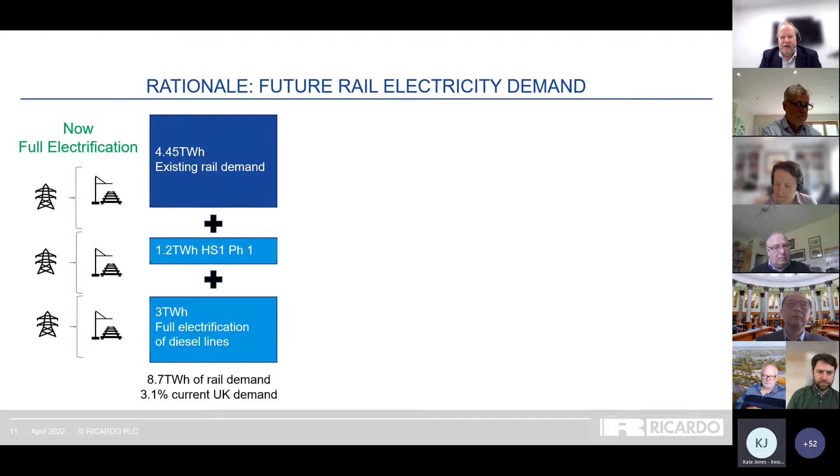The first was to look at trackside batteries - the conventional solution, but with a battery system buffering the grid connection to the railway.

The second option was discrete electrification with a battery on the train. In this case, we don't electrify all of the track, but we provide around 10 kilometers every 40-50 kilometers or so to recharge the train battery as it passes under a short section of overhead line. This requires a bit more storage trackside to cope with the peak demand to recharge the battery on the train, as well as power it through those 10-kilometer stretches.

The alternative we looked at was hydrogen - either direct connection of renewables to hydrogen production, or potentially using grid electricity, storing hydrogen either at the production site or at the rail depot, and then refueling at the depot to provide the trains with fuel for the coming day's service. So that's the concepts we looked at.

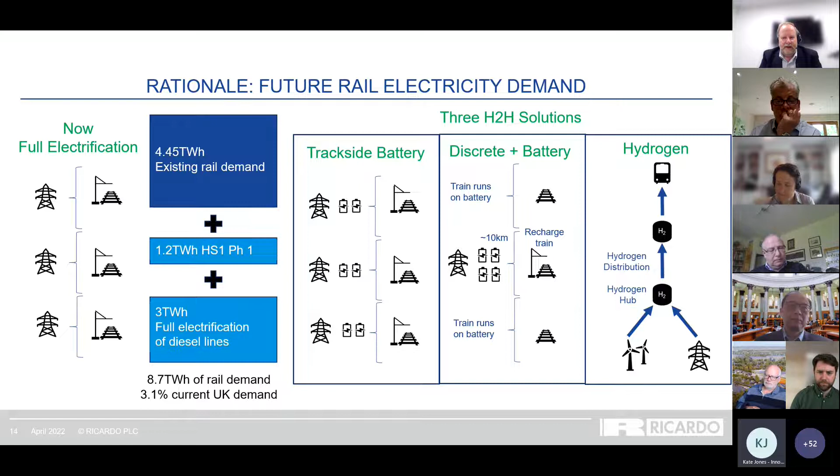The things driving us towards this were that full electrification has a high capital cost, well known to be expensive. Since the rail decarbonisation strategy was looked at a couple of years ago, we're in a slightly different situation - costs are a concern to the railway given competition with other modes and lower passenger ridership numbers. Full electrification adds a very substantial fixed capital cost at the beginning, plus operating and maintenance costs through the long-term life of those assets.

If we think about full electrification, we're adding a substantial amount of fixed demand that's inflexible, unlike other sectors of transport like EVs, which will have more flexible charging. We noted that in 2020 there was a curtailment of about 3.8 terawatt hours - quite similar to the additional railway demand they were planning to add. That cost consumers £243 million, around £8.5 per household. So if we can be more flexible in our electrification decarbonisation of the railway, perhaps we can access some of those savings for customers.

The final thing is that these solutions require a more collaborative and smarter approach. Historically, the relationship between the electricity industry and the rail industry has been rather transactional, using standard solutions. As Matt pointed out, we need to be working collaboratively on these kinds of solutions.

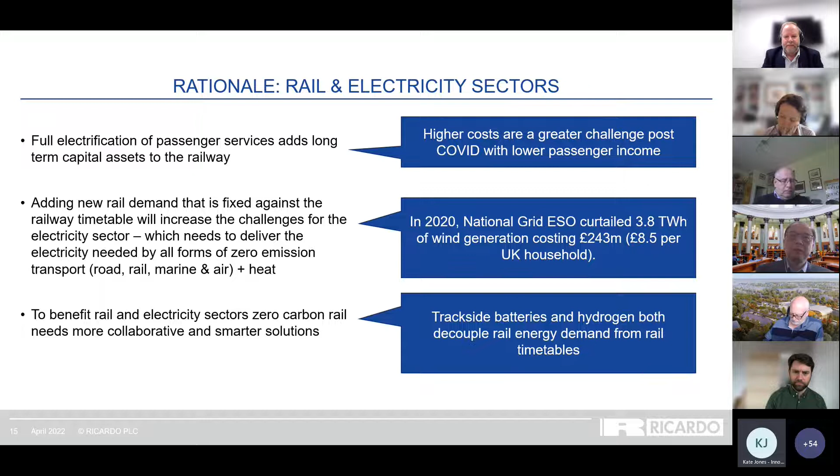So why did we choose Scotland? Several reasons. For the railway, the plan to remove diesel passenger trains is a little earlier, five years earlier, in 2035. Scotland's railway has always had a more holistic approach between the infrastructure operators, Network Rail, and the train operating company, ScotRail. Now that ScotRail has moved into public ownership, both are public sector organisations, so having a collaborative, integrated, holistic solution has better baselines to work on.

From the energy sector point of view, Scotland has higher ambitions for renewables and hydrogen, and a lot of Scottish power is already produced from renewables. There are also more constraints on renewables, so the benefits of flexibility and being able to release some wind farm constraints would be more realisable in Scotland earlier than perhaps in other parts of the UK.

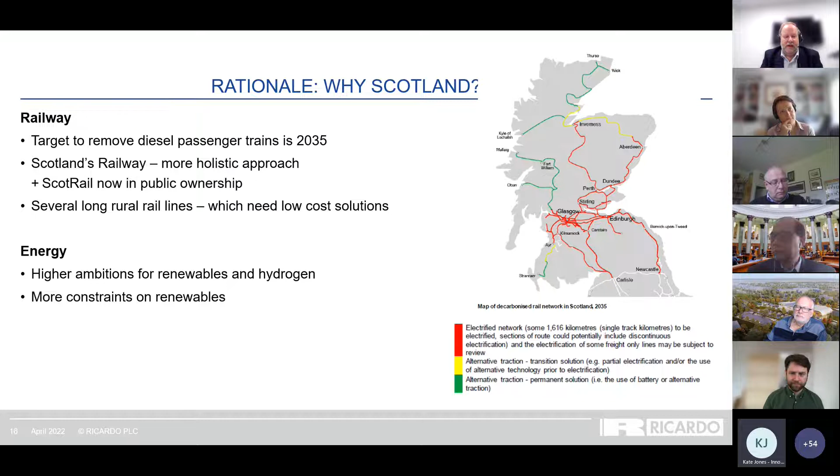Zooming in on the two lines we chose - the first is the line from Inverness to Thurso and Wick, which is 280 single track kilometres, quite a rural route, taking some long excursions inland to avoid high gradients. It's relatively rural, so a relatively modest number of bridge interventions, which are costly for full electrification. We looked at the traffic and the substations as part of our assessment.

The second line we looked at is slightly shorter - from Girvan on the southwest corner of Scotland down to Stranraer. The plan under current proposals is to electrify fully from Glasgow to Ayr and then Girvan, but not to continue the further 65 kilometres south. There's quite a large number of bridges here because it's a slightly more populated area than the line north of Inverness.

So those are the two lines we chose, hopefully giving us two examples that would explore the different solutions and see whether we came out with some conclusions.

So, next slide please.

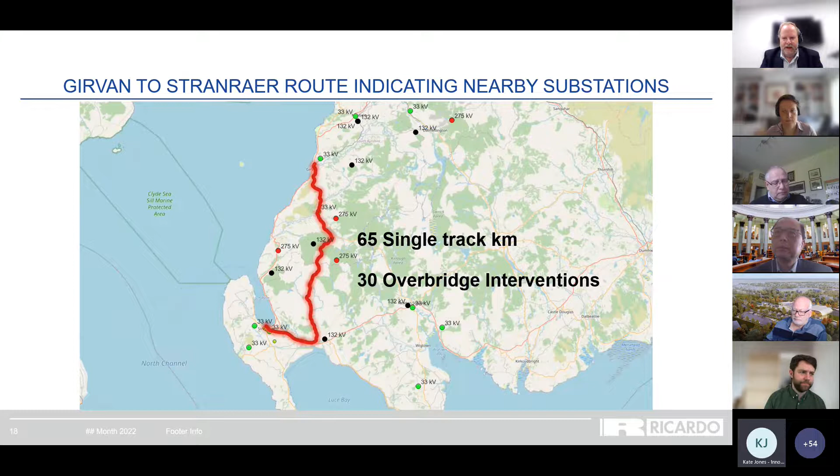We undertook a large amount of data collection and stakeholder consultation, including the project partners, but also talked to two other discovery projects: the Hubs project led by University of Leeds, which we are also a partner in, and the rail decarbonisation planning project, which you'll hear about later. We shared insights with the relevant discovery projects in this early phase. We also spoke to providers of hydrogen trains and companies involved in partial electrification to understand costs and problems. We attended the first rail conference in Scotland post-COVID, making contacts and gaining insights from delegates and speakers.

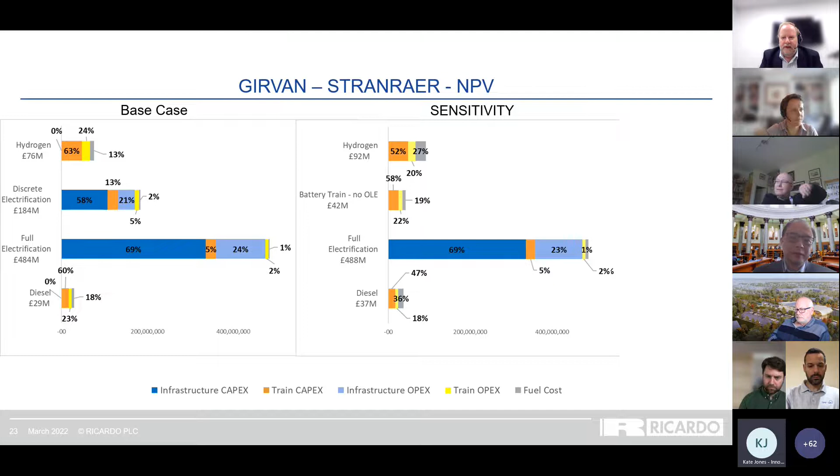We took a qualitative review of the flexibility aspects. We would need to do a detailed half-hour analysis of demand to do a financial cost-benefit analysis of the flexibility benefits to the electricity sector. But we did a qualitative review looking at which of the flexibility services currently in the UK electricity market could be accessed by the hydrogen or battery solutions, and that showed that the majority would be accessible by the scale of system we had in mind.

If we proceed to Alpha, one of the key things will be to quantify that by using more detailed time series analysis of the electricity demand for the trains, and therefore the impact on hydrogen production or battery storage by the trackside.

So our next steps are twofold. The green hydrogen fueling solution for hydrogen electric trains is the lowest cost for the Far North Line, and that remains the case under the sensitivity analysis we've done so far. In Alpha, we propose to assess the full benefits of that, particularly focusing on the flexibility aspects of green hydrogen production, and to work through some of the more practical aspects to make sure there are no major practical barriers or costs that were missed in the initial 8-week discovery phase.

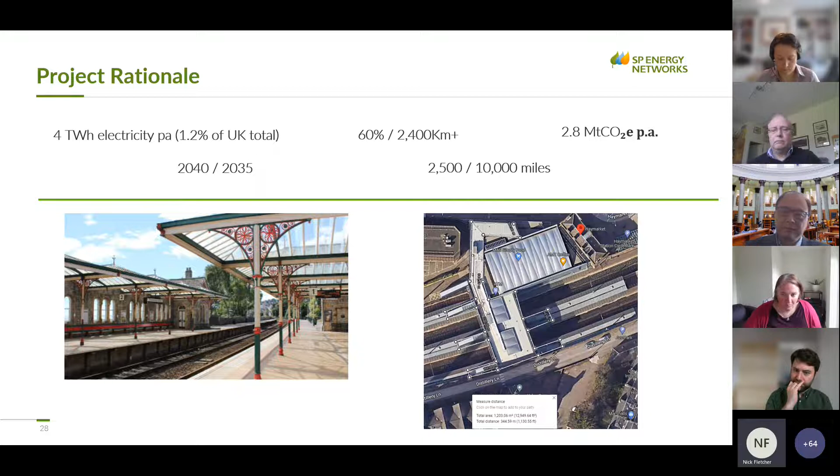So what is the Hubs project and our approach to the discovery phase? Hubs is basically looking at how we can bring together renewables, hydrogen supply, etc., around these railway stations. Within the UK there are 2,500 stations. Not all of them will be applicable to the Hubs model we're suggesting, but we're looking at what we can do for the vast majority possible.

We like to think this is the first of a kind around these stations, and also that these will be able to link cities and communities across the country to support green mobility and the future requirements of the power grid. There are two major driving factors of the energy hubs: one is to reduce the carbon emissions of the rail stations and make them carbon neutral, the other is to retain financial competitiveness in the transport industry compared to other means of transportation.

There are 4 key technology pillars to our approach. First, there's machine learning assisted digital twin technology. This gains us insights into energy flows, provides predictive energy management, and improves overall energy efficiency.

Secondly, there's a wide area optimal planning and operation coordination framework to network and integrate hub flexibilities and enhance rail power supply resilience and provide services to the power grid.

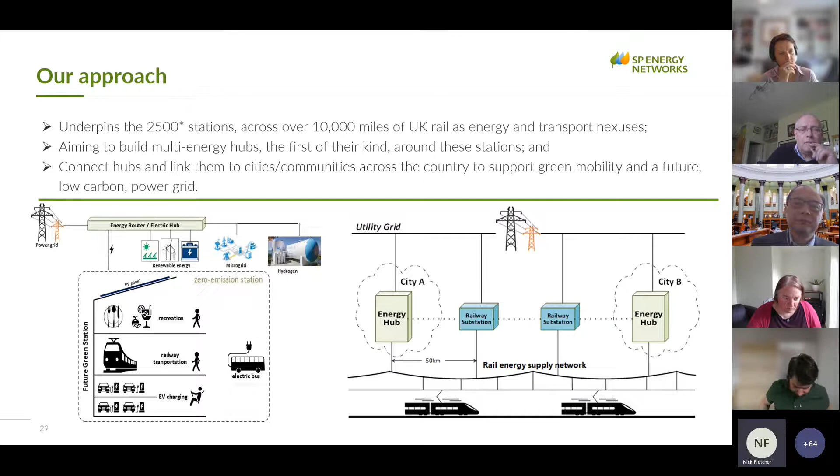We looked at a considerable number of stations, predominantly in Scotland. We tried to look at different classifications of stations - not just those with a high volume of footfall, but rural stations as well, which might be applicable from that set.

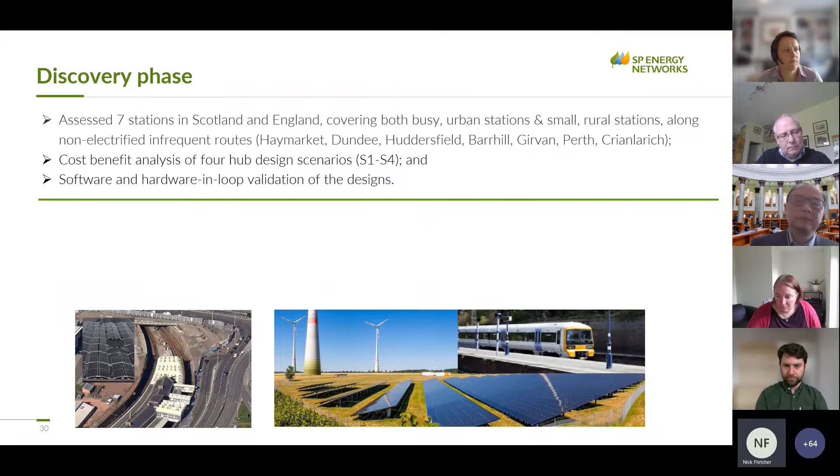As you can see here, we looked at 7 different stations altogether, and a number of different scenarios because obviously one size will not fit all. Each of these scenarios builds on the other - the first is looking at station roof photovoltaics and battery storage, adding on to that then car park PV canopy and so on until you get to scenario number 4.

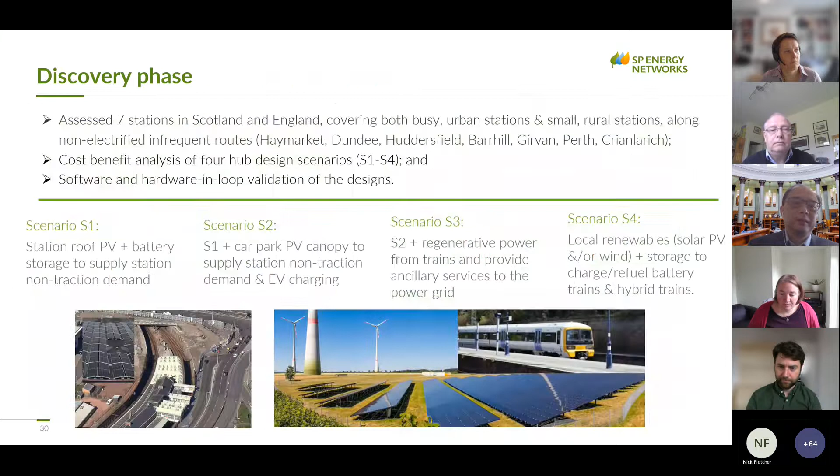In the second scenario, building on scenario 1, we included the car park PV canopy. The CapEx has increased to just over £500,000, but at the same time the OPEX has fallen to nearly a third in both cases, with a payback period of 4.7 years in one instance. The final one, scenario 3, the recommended design, results in a net zero station, with a considerable fall in OPEX. The cost benefit analysis shows the example payback period of the first 3 hub designs for a busy urban station is between 4.7 and 7.6 years in the context of increased tariffs.

This is on the route Colin was talking about, to Girvan and Stranraer - this is the rural station, Barrhill, deemed unsuitable for electrification. Our energy hub design can recharge and refill batteries and hybrid trains with an optimal payback time of about 12.6 years. This avoids expensive electrification investment for those rural, infrequent rail tracks.

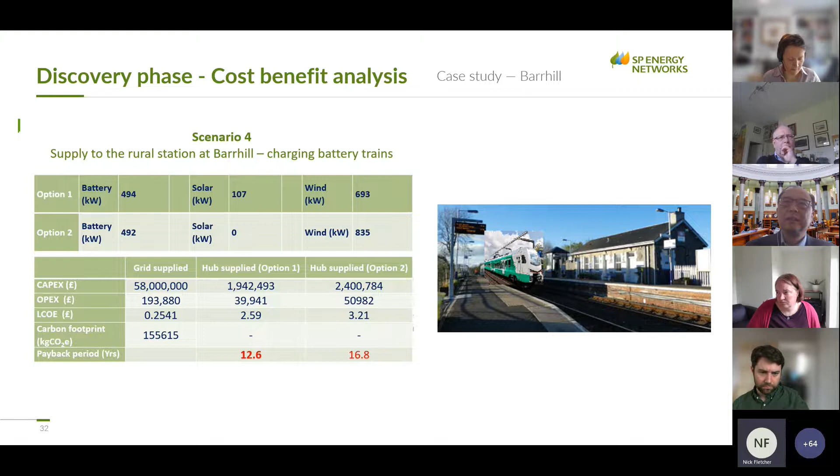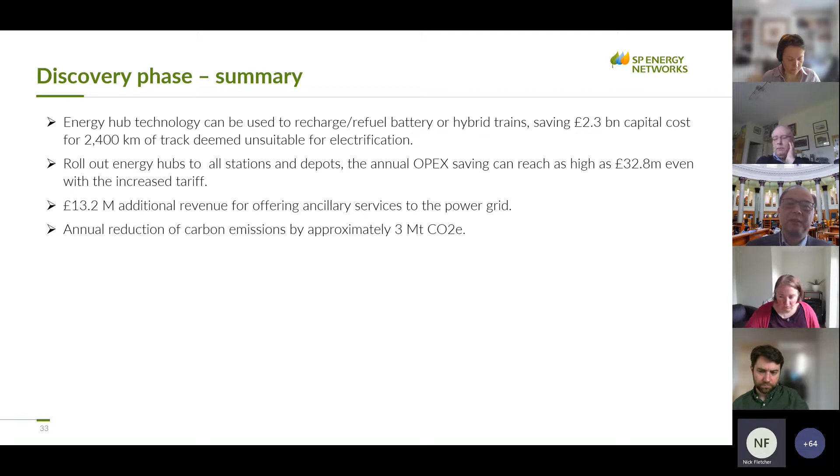As you can see, several things came out from the actual discovery phase that the team conducted. In 2020 to 21, of the UK's nearly 16,000 kilometres of rail routes, about 10,000 kilometres are not electrified, accounting for a share of 62% of trains running on diesel. To decarbonise the track which cannot be electrified, Energy Hub technology can provide total capital cost savings of about £2.3 billion if the hubs are used to recharge and refuel battery or hybrid trains.

On the second point, the UK's annual non-traction load is 440 gigawatt hours and costs around £48 million. If energy hubs are built for all stations and depots, the annual OPEX saving can reach as high as £32.8 million with the increased tariff.

In the UK, there are 343 large railway stations, which can provide more than 600 megawatts of power. The scaled annual cost of firm frequency response is £22,000 per megawatt hour, which represents £13.2 million additional revenue if the hubs offer ancillary services to the power grid. So it's not just taking from the grid, it's giving back to the grid as well.

The rollout of energy hubs to all stations would lead to an annual reduction in carbon emissions in the UK by approximately 3 million tonnes of CO2.

All 4 design scenarios have suggested the payback period for the optimal hub design is between 4.7 to 12.6 years, depending on which scenario you choose. As I said before, there's not one scenario which fits every station — we have to allow for variations in station design, layout, etc. For busy urban stations, scenario 3 is recommended, which offers deep decarbonisation and better efficiency, with a payback period of 7.6 years.

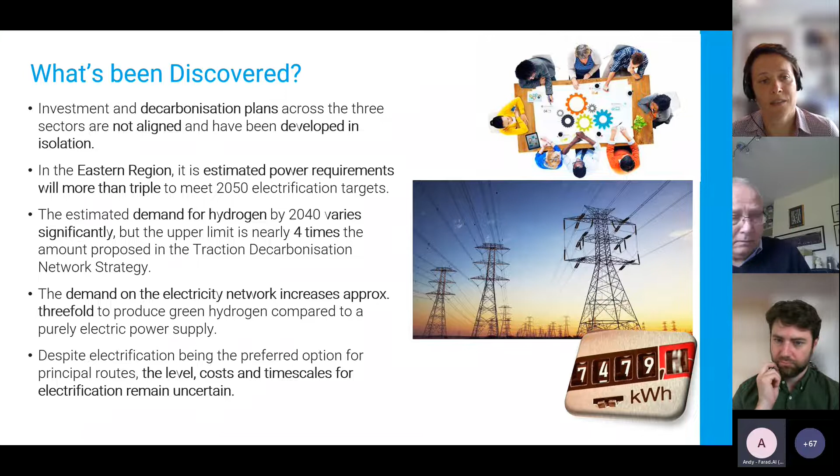The gaps that remain: the greatest challenge is to replace diesel rolling stock with cleaner, more environmentally friendly forms of traction power. With a proportion of the current diesel rolling stock approaching its end of life, there is an urgent need for the rail industry to develop a viable strategy for fleet replacement.

There is significant uncertainty regarding the level of electrification likely to occur due to affordability and timescales of delivery, requiring the rail industry to find other viable low-carbon solutions to replace diesel fleets, with hydrogen fuel cell power being an obvious choice for many. Hydrogen fuel cell powered trains are a viable and technically feasible option to replace many diesel-powered vehicles, however they have limited use cases and are not suited to high-speed passenger services or freight services in particular.

Despite such challenges, the distribution of hydrogen becomes a key factor in making hydrogen-powered trains operationally useful. Depending on the level of electrification achieved, the need for hydrogen varies significantly, and where it will be needed. Further work is required to understand the whole life costs of different electrification system types versus alternative traction power technologies, including the most cost-effective methods for generation and delivery of hydrogen to where it's needed. This requires collaboration from all three sectors to develop a data-driven methodology that can determine the least regret options to achieve rail decarbonisation in the required timescales.

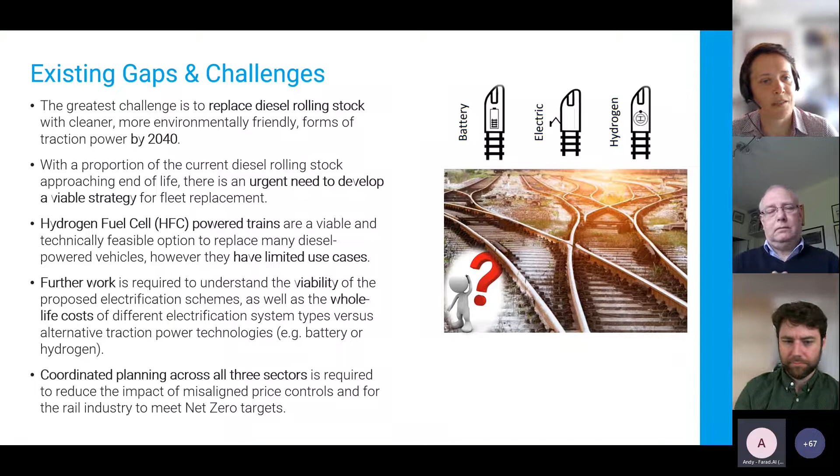After reviewing the work done to date, it's clear that closer coordination between the energy networks and rail industry, combined with a more analytical approach, is required to assess the optimal interim and long-term rail decarbonisation solutions. From the discovery phase, it was found that current decarbonisation plans are in the most part developed in isolation without utilisation of optioneering tools that can encapsulate the coordinated short-term and long-term benefits across the rail sectors. It's also clear these plans have been developed on the basis of historic interactions with minimal consideration of how the changing energy landscape will impact other sectors.

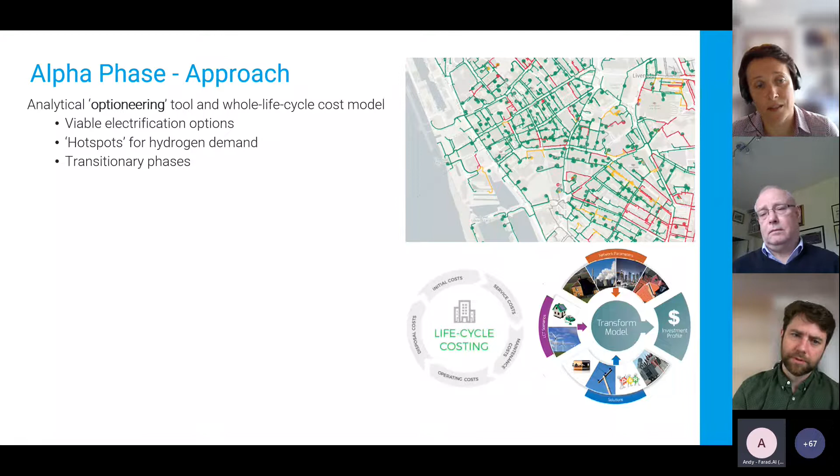An alpha phase is needed to showcase how a collaborative data-driven approach can improve efficiency of decarbonisation planning and demonstrate the cross-sector considerations that will need to be made in future infrastructure and investment plans.

This will identify least regret opportunities in the electricity, gas and rail sectors for coordinated investment to accelerate rail decarbonisation at lowest cost to GB energy consumers. An optioneering tool will be developed to identify the optimum, intermediate and long-term decarbonisation options available, considering whole life costings. The decarbonisation solutions considered are: electrification, partial electrification with battery technology, local electrolysis hydrogen production, hydrogen production at scale remotely then distributed to the railway by pipeline, and continued use of diesel up to 2040 or switching to green diesel.

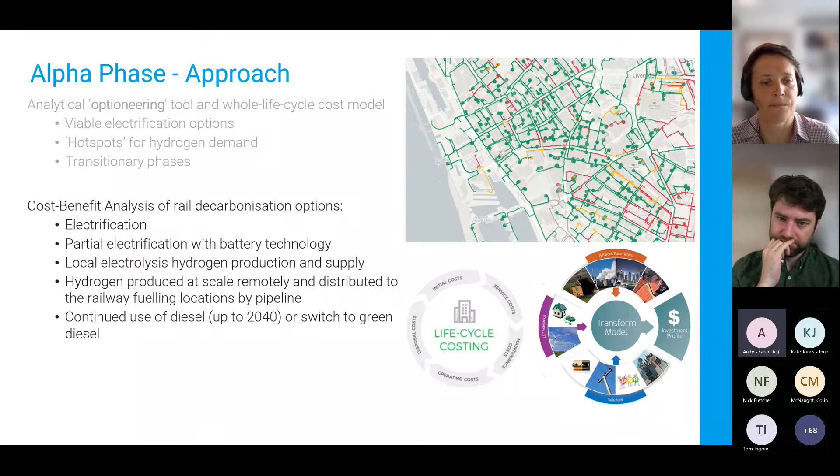Next slide, please. The primary outputs will be an optioneering tool comparing the decarbonisation options across a selected case study region, Tees Valley, and then proposing a beta phase business case.

The tool will enable the rail industry and energy networks to align infrastructure investment in a cost-effective way that will deliver decarbonisation of rail. It is envisaged that following a similar methodology, the tool will be able to be scaled for deployment across the UK, factoring in local rail and energy infrastructure developments, utilisation forecasts and specific needs.

The beta phase will separately take the recommendations from this tool to identify where a demonstrated project offers the greatest potential to gain whole system experience of operating a pilot hydrogen train fleet and least regrets opportunity for Northern Gas Networks and other stakeholders in the region.

At this stage, the primary users are considered to be the energy networks and rail industry, but there is also potential for interest from renewable generators, hydrogen production facilities and other emerging sectors in a hydrogen fuel source.

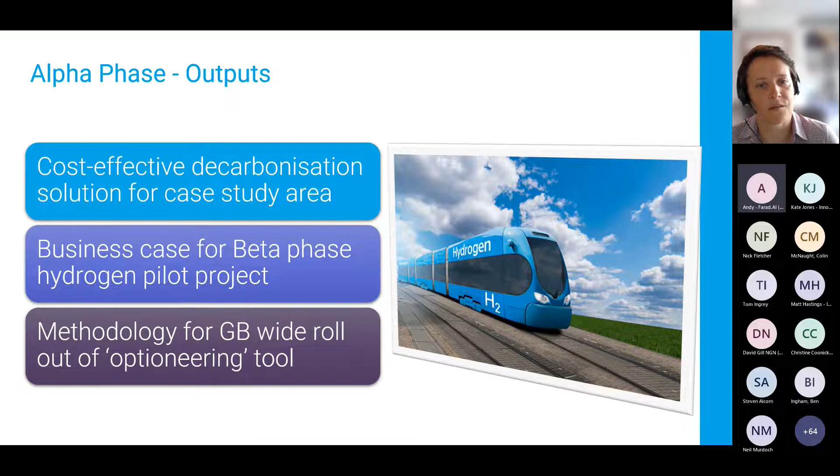Next slide, please. The benefits of this will be through the development of a cross-sector decision support tool that will enable cost-optimised decisions to be made when considering what decarbonised options are available to replace the existing diesel trains with net zero replacements. In general, the coordinated approach will lead to improved infrastructure investment planning to identify efficient investment opportunities that reduce expenditure and stimulate the hydrogen supply chain.

Accelerated decarbonisation of the rail industry through efficient planning and utilisation of existing infrastructure, and a cost-efficient, low-carbon, reliable rail industry benefiting consumers, industry and the wider economy.

The wider impacts, although the optioneering tool is specifically focused on decarbonisation of rail transport, our project will generate learning that is relevant to other sectors. In particular, as infrastructure for hydrogen is developed, other users and industries will need to ensure that there is a fit with their own business requirements and location. Our tool could potentially be adapted to support their decision making.

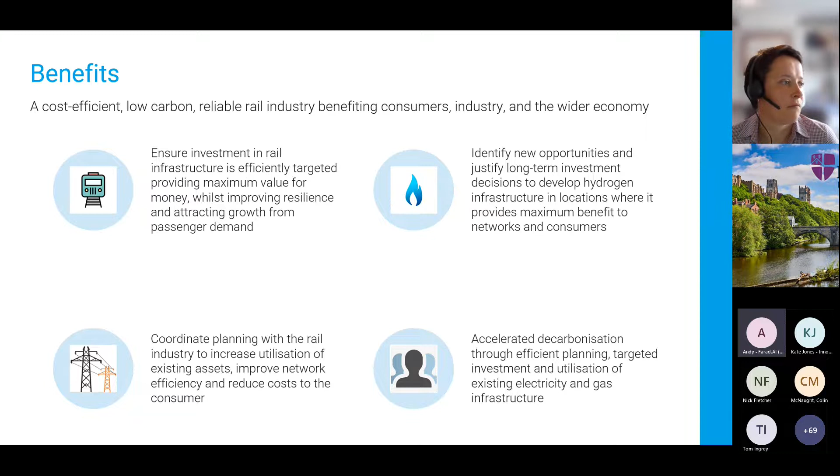And to conclude, the discovery phase has found that investment and decarbonisation plans across the three core sectors are not aligned to date. The level costs and timescales for electrification on the rail network remain uncertain. The demand for hydrogen varies significantly, both in quantity required and where it is needed, and a coordinated approach is required to meet decarbonisation targets on time and in the most cost-efficient way.

An alpha phase will develop a data-driven methodology that can determine the least regrets options to achieve rail decarbonisation in the required timeframes and at lowest cost to GB energy consumers and rail network users. And it will leverage the stakeholder relationships across all three sectors and expertise of project partners.

And that's it. Thank you very much.

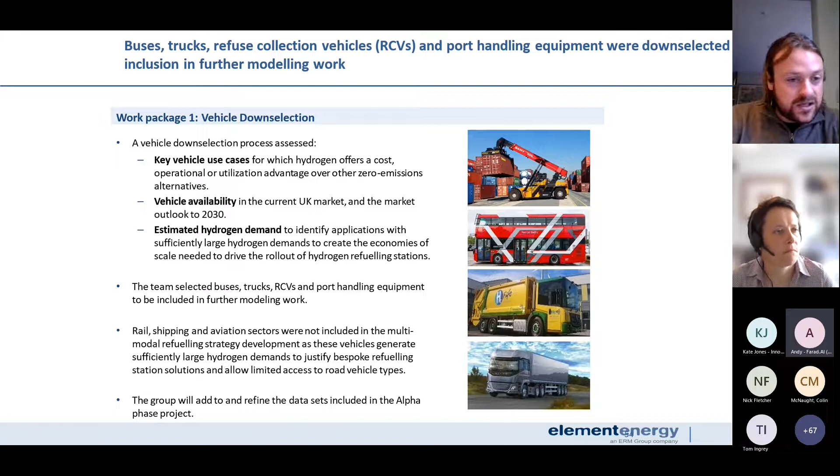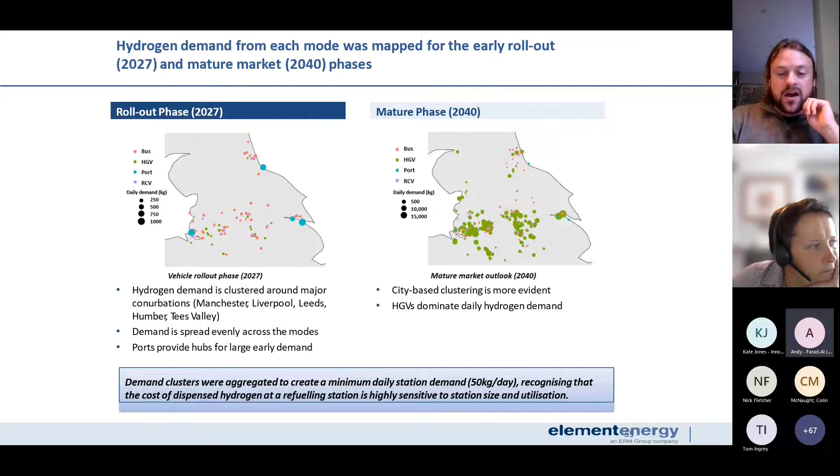What you can see, perhaps less clearly in the rollout but starting more clearly, is that demand is, as expected, likely to emerge around the major conurbations in the north. While initially these modes will be fairly scattered, as we get to a more mature phase, freight is likely to dominate in the road transport sections.

So that's more or less just summarising what I've told you - things like ports are great sources for hydrogen demand.

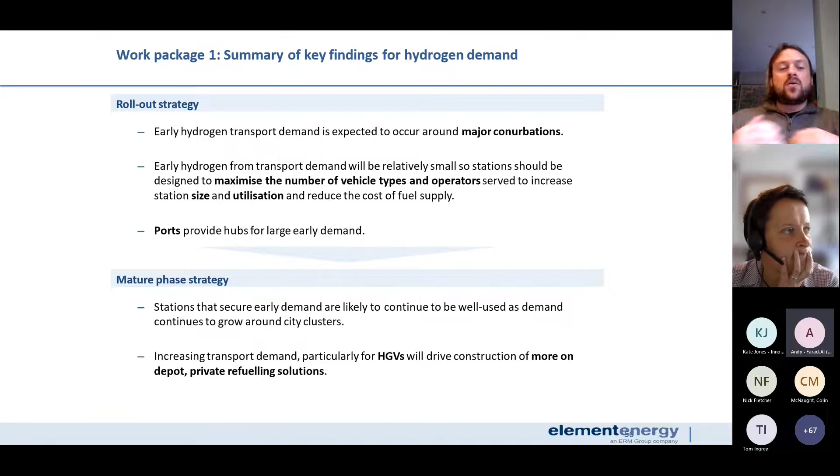If you're looking at demand emerging in the early phases and looking to build stations there, then stations built around those early demands are likely to continue to be well used as demand grows around city clusters.

The next part of this is that the Athena tool takes into account data on the routes of HGVs and a number of other vehicles, and tries to assign optimally located hydrogen refuelling stations to scale up their size, while taking into account real world detour constraints.

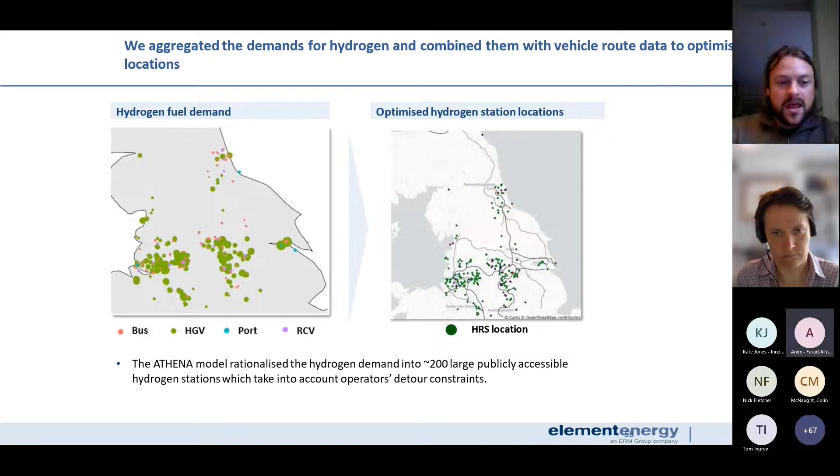So there's a real economic driver for operators to shift their diesel behaviour patterns slightly, certainly in HGV sectors where they might have fuelling at their depot. There's an economic driver to find optimally located stations where a number of operators can share these refuelling facilities and significantly reduce their fuelling costs.

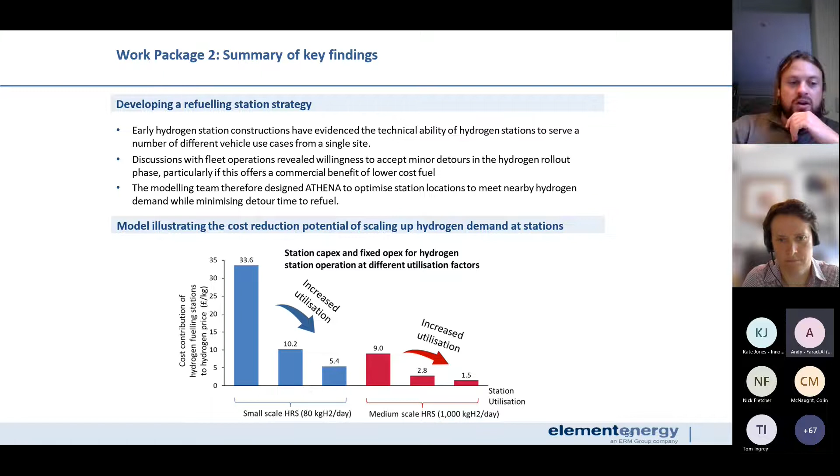So now I'll talk a bit about production and supply. I've set out the demand emerging for transport and how we can meet it with refuelling stations. A key point of this project is ensuring there is effective coordination and planning between the strategic road network and the gas network.

To facilitate that, the gas networks are starting to respond with plans for dedicated hydrogen pipelines and their supply. It's talked about a lot - the gas network converting to hydrogen. Part of this project's learnings and engagement with the likes of Northern, Cadent and National Grid was to understand how this is actually going to take place. Initially, it'll be local distribution networks around those major point sources of production.

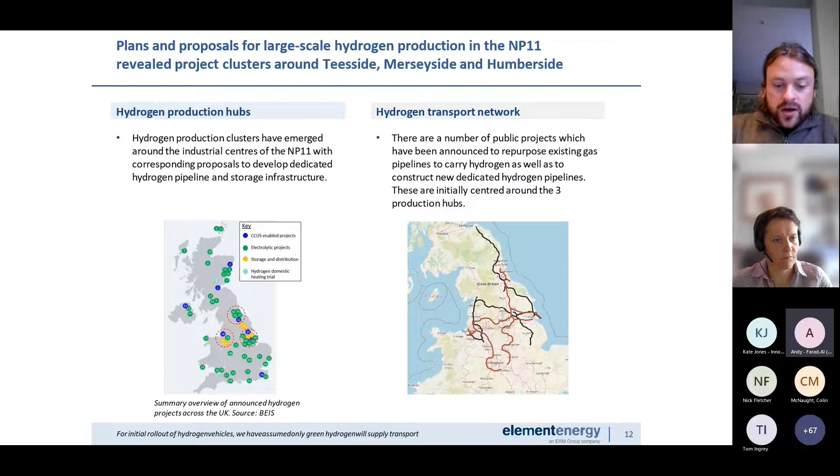And the map on the right shows a larger plan for a dedicated hydrogen transmission and distribution network that looks to join those stations up. So if you go onto the next slide, what we tried to do was join up the transport mode, which is work packages 1 and 2, with the hydrogen production and supply modes, which is work package 3.

So the Athena modelling tool absorbed those data inputs, and we modelled 4 kinds of station supply scenarios. You've got a rollout phase for 2027 with stations predominantly supplied by the incumbent tube trailer, truck and trailer technology, and then 3 mature phases where the model compared and contrasted stations provided with only tube trailer and on-site production versus stations provided with pipelines, tube trailers and on-site, and also one example that's pure pipeline only.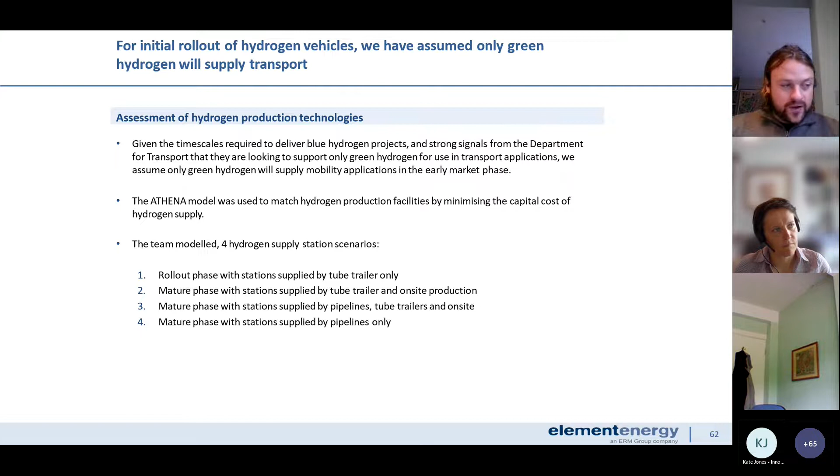The aim of doing this, and what we're planning to evolve in Alpha, is to refine this and allow comparison. If you can go back one, on mine it's slide 14, yeah that one. So here's the scenarios that were modelled.

Effectively what you can see is hydrogen being generated from these major hubs in the rollout phase, and the point sources that it's most cost effective for those stations to supply. So the modelling tool is aiming to minimise the system's costs of supply.

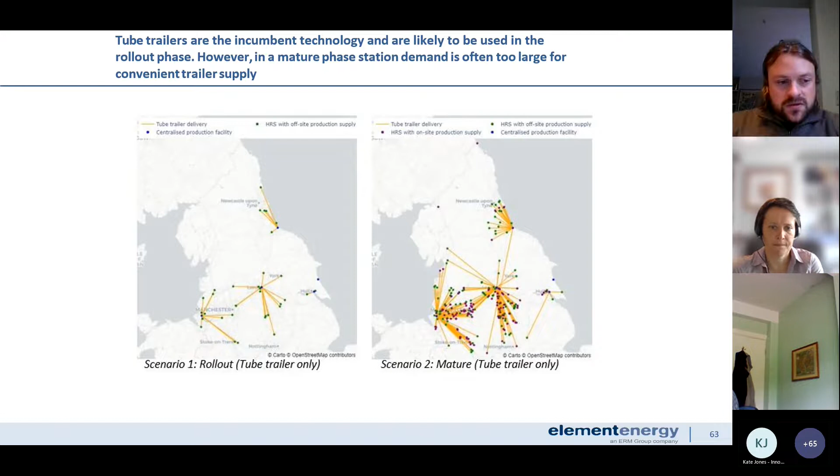What you start to see, in the rollout phase it's fairly doable to supply with tube trailer technology, but in the mature phase those lines are getting incredibly busy. Actually what we learned was that station sizes start to become so large that truck and tube trailer deliveries become both operationally difficult to manage in terms of the number of deliveries per day, and also not cost effective.

So if we go on, finally I can talk a little bit about those overarching conclusions. This is more just what I've talked to already, which is that we see the future of the gas grid and the road network looking something like large point production sources around the industrial clusters.

Even some small stations that are located close to those clusters being cost effectively supplied with pipelines. Effectively that's a kind of low regrets opportunity. As hydrogen demand ramps up, those pipelines will obviously be able to supply more hydrogen cost effectively.

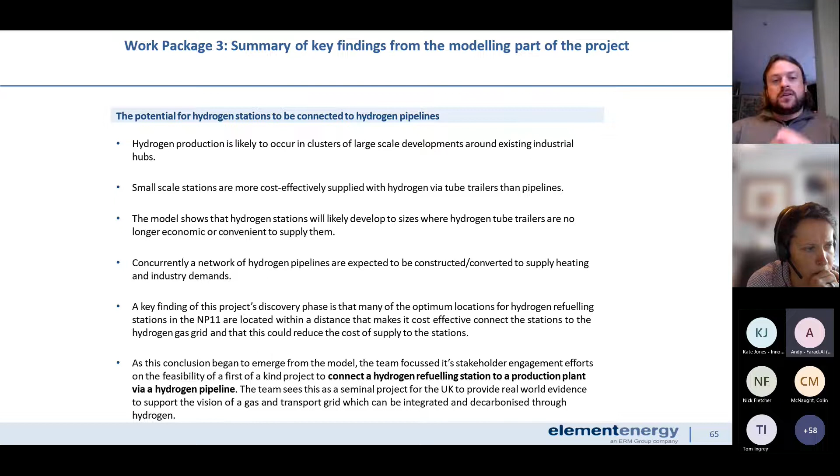But that there is a real case commercially for the gas network to supply hydrogen to these large stations. And so what we did in work package 4, if you go onto the next slide, was start investigating a real world case that we can develop through the alpha and beta phases to show off a world first design of a station that is directly linked to a hydrogen pipeline.

Through this stakeholder engagement, we identified 6 potential projects, each with a number of partners that we've had to redact for confidentiality reasons. But in theory, these are all potentially prime sites.

So they are large vehicle deployment plans located not too far away from plans for a large hydrogen production source, and therefore are prime candidates for a first hydrogen refuelling station linked to a pipeline, hopefully supplying a multimodal demand for hydrogen transport.

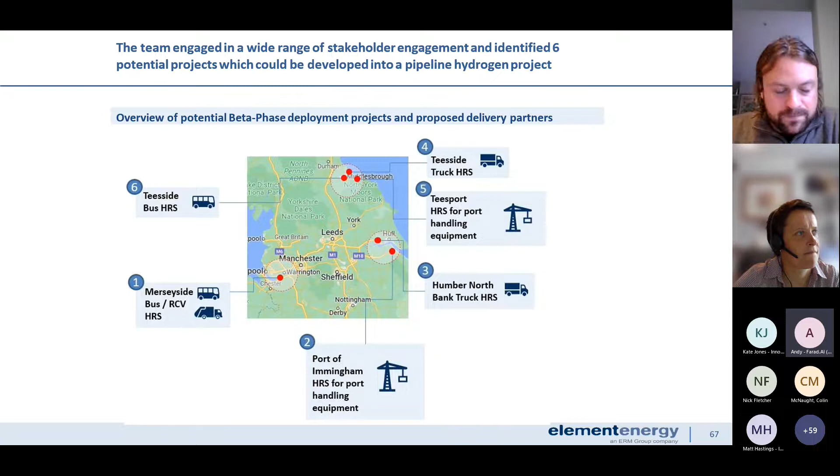So going on then into the alpha phase, our plans then, and coming to the end, what we have and what we set out with was developing this Athena model to facilitate a more collaborative and coordinated planning approach between transport and the gas networks.

We plan effectively to carry on the same 4 work packages that we had developed and split them out along a line of strategy, modelling and feasibility.

These are the strategic work packages, which is effectively around building on this Athena model, refining the data sets, potentially including other modes of transport like coaches, landside, airport demand, and potentially trains. Starting to make the model looking at today's policy focuses to get a sense over the next 3, 4, 5 years where the system will develop.

Then showing off more incremental scenarios for the development of that system. The dispensing is around understanding and refining those station locations based on model scenarios and sensitivities, and getting a slightly more refined station capital and operating costs.

I think the real useful part of this, or output that comes out effectively, is being able to use the Athena tool to show different rollout scenarios and hydrogen pricing and development scenarios, and comparing those different scenarios. What the tool will give us is an optimized system cost that minimizes the total hydrogen supply cost.

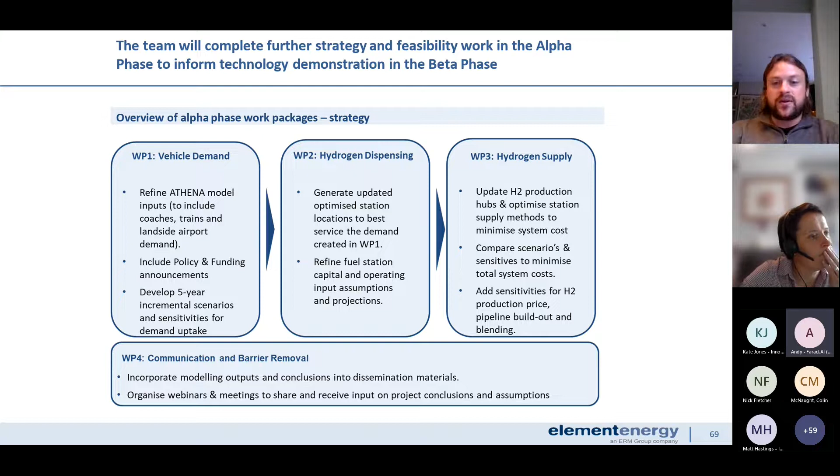If we go on to the last slide, the other aspect of this is around the feasibility. I've already talked about how you might develop this along the lines of a real project for real demand. So we're looking to really join up SIF funding with a number of other funds, things like zero emission bus funding, zero emission truck funding, the Tees Valley hydrogen vehicle operators, to create a viable total cost of ownership case.

That's obviously crucial, as I said, they're the end consumer. So linking those vehicles with a competitive TCO to hydrogen refueling station suppliers, and then looking to join up with large scale hydrogen production hubs via a pipeline, is exactly what this project wants to do. Effectively we see this as a world first chance to evidence the gas grid's capability of supplying future decarbonised hydrogen transport demand, and supporting and de-risking the conversion of the gas grids to net zero.